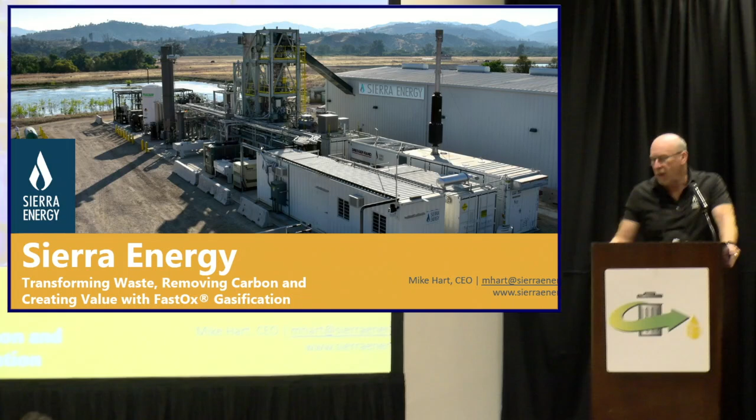And pictured here is our first facility, which is up in Monterey County. Not the pretty part, the other part. So don't think downtown by the water or anything. This is on a military base out in the middle of nowhere. But anyways, I'm going to be talking a little bit about our FastOx gasification technology.

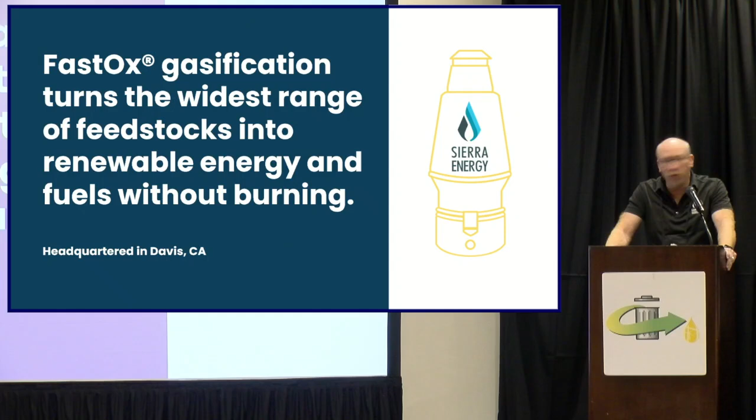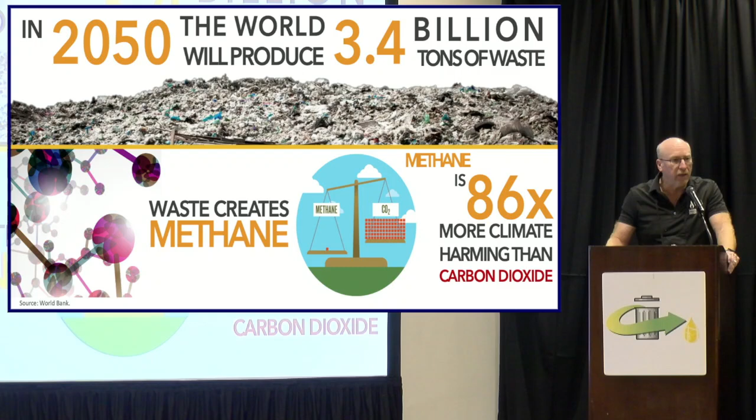And so what we do is our gasification technology can take any form of waste and break it down into its constituent elements, and does it without burning and without any waste product. I'm preaching to the choir here. As you know, the world creates a whole bunch of waste, 3.4 billion tons by 2050. And that creates an enormous amount of methane, which is 86 times more impactful than carbon dioxide.

The good news, we can turn it into all kinds of good things like clean energy. Bad news is there are all kinds of caveats to that. In fact, if I had to say there was one technology other than perpetual motion machines that needs a working model to prove it, it's going to be gasification. The field is littered with dead bodies as far as gasification technologies that didn't work out.

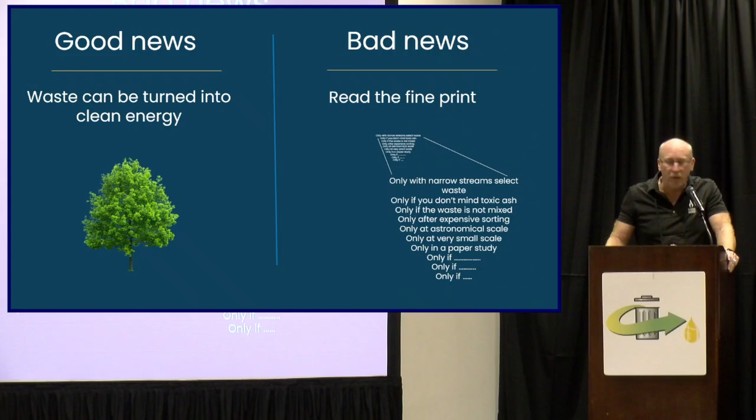And so there are lots of caveats, and there's a lot of limitations to what technologies historically can do in gasification. Usually a very highly desiccated, segregated, homogeneous waste stream with a certain BTU value that's been pulverized, dried, beaten, separated, God knows what else. The problem is that's really expensive and really hard to do, and it leaves a lot left over. So you were probably getting to this part ahead of me, that we're the solution.

But these are the different feedstocks that we have demonstrated on with our technology, with our partner, the U.S. Army, over the last 20 years of building progressively larger systems. Tires, municipal solid waste, pretty much any kind of biomass. Batteries, electronic waste, construction and demolition debris, medical waste, and pretty much any kind of hazardous waste. We operate at 4,000 degrees Fahrenheit. At that temperature, it forgives a lot of sins in your waste.

And so how our technology works is we introduce the waste into the system. It descends by gravity, and it reacts. The carbon in the waste itself reacts with oxygen and steam that are injected into the vessel. So there is no other energy form being put into it. It's just a reaction of the carbon in the waste with the oxygen. At 4,000 degrees Fahrenheit, it rips things apart. What you end up with is molten metal, liquid slag, which is a saleable product, and the balance is a synthesis gas, in our case, carbon monoxide and hydrogen.

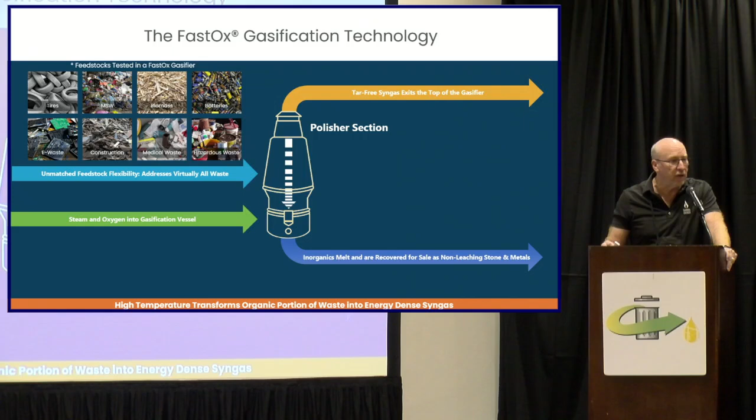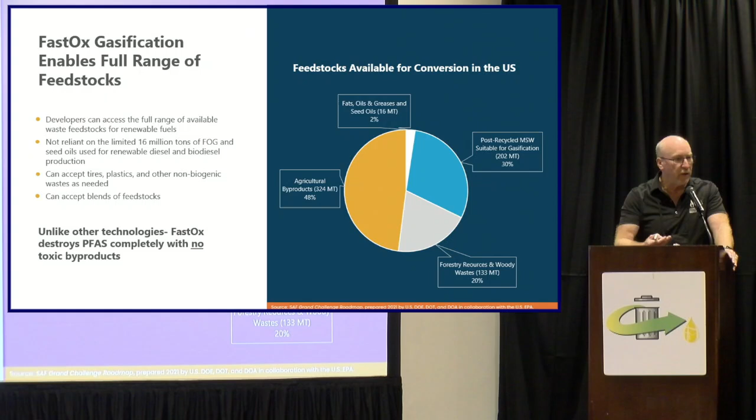A lot of people in the renewable fuel space endlessly talk about sustainable aviation fuel. Typically, they're focused around fats, oils, grease, seeds. There's this very narrow segment of feedstocks available when you want to make renewable fuels. Gasification, in general, opens the door to other feedstocks, such as municipal solid waste, agricultural waste, all of these other sorts of things that simply wouldn't be available otherwise. So gasification is an enabling technology.

There are other technologies talked about at these conferences, such as plasma, fluidized bed, indirect, and pyrolysis. Now, these are generally true. There may be exceptions to each of these categories, but in general, what we found is that there are limitations. In some cases, it's not a flaw, it's a feature; for example, pyrolysis focuses on a narrow segment of the waste stream. But they make a pyrocrude that can do all kinds of great things.

But what I'm saying here is that the real benefit of FastOx gasification over other sorts of gasification historically is a much higher yield, and that is the amount of synthesis gas you generate net after you've taken that waste and converted it using our process.

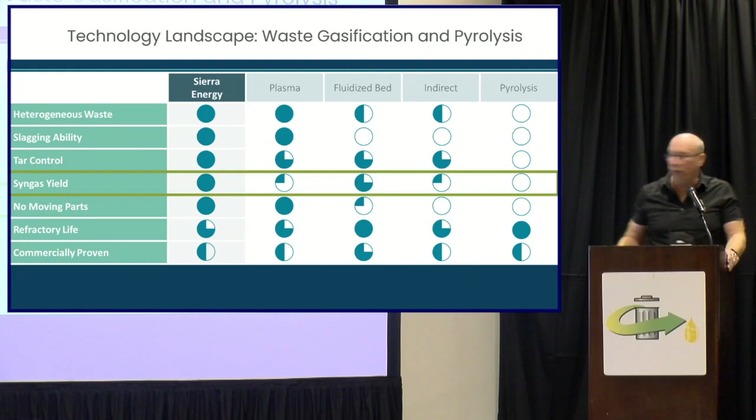Again, preaching to the choir. In fact, I saw a really good slide earlier today I'm going to steal later.

But as far as different things that you can do with synthesis gas, from the 10,000 plus inquiries we've received as a company, things that people want to do, or where there are processes that already exist to take waste and turn it into something of higher value through syngas: fertilizer, renewable natural gas, methanol, and all the things that unlocks, various chemicals, useful heat, protein, I didn't see that on the slide earlier, fuels and electricity. But the most common request we have been receiving is hydrogen. People are bananas about hydrogen right now because the incentives are lined up in the right direction.

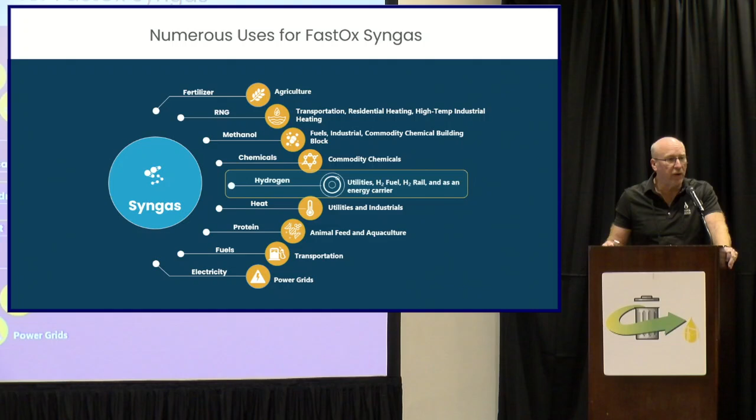So these are all different things that you can make from synthesis gas. This gives you an idea of yield. In this case, we're looking at a 200 metric ton per day system, 200 metric tons per day of different kinds of feedstock, and what it would yield generally in different things. So if you were to make hydrogen, for example, this gives you the number of tons per year of hydrogen that you would create from 200 tons of waste per day coming in.

Electricity, methanol, renewable natural gas, and ammonia are all shown. They're just giving you some examples based on different kinds of feedstocks. This shows the calorific value of those feedstocks converted to those end products. By the way, we don't do that. We just make a gasifier, and we make it available to other people to integrate into their very clever processes. We don't do the clever stuff.

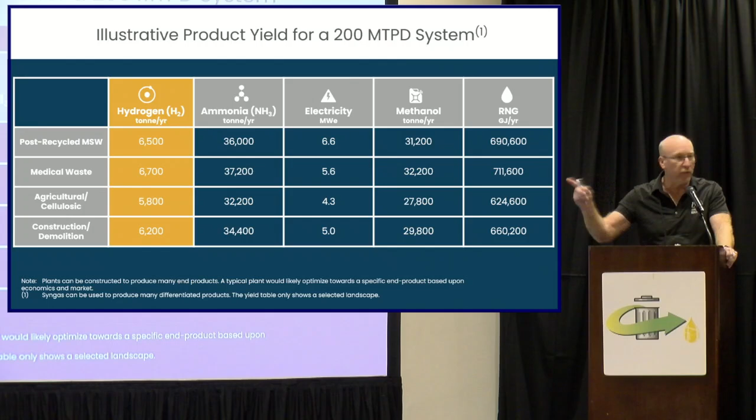So this is our demonstration facility at Fort Hunter Liggett in Monterey, California. We've demonstrated this system here since 2019. These are some of our investors, Breakthrough Energy Ventures, Cox, BNP Paribas, et cetera. I'm here because I am also the CEO of Sierra Railroad Company, which is the largest investor in the company, and I got into this to make fuel for my own fleet of locomotives, which are all over California. These are the folks that have invested in our company to bring it this far. Some of our partners, mostly governmental entities, have helped develop and demonstrate the technology, as well as a number of awards we've won.

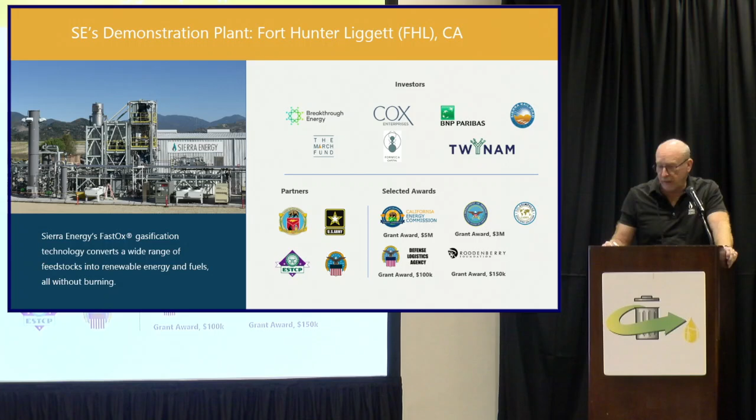So some of the benefits to folks that can use this technology is that you've got a modular design at 100 tons per day per module. We set that size arbitrarily. I was mentioning to some of the guys here that are doing a 50 ton per day gasifier, actually that's what we started with, but we had so many people saying that they really wanted to see something larger, and they had money, so we did what they said. So we went with larger systems. Right now, most of the customers we're working with are in the 200 to 500 metric tons per day range, so 2 to 5 modules put together.

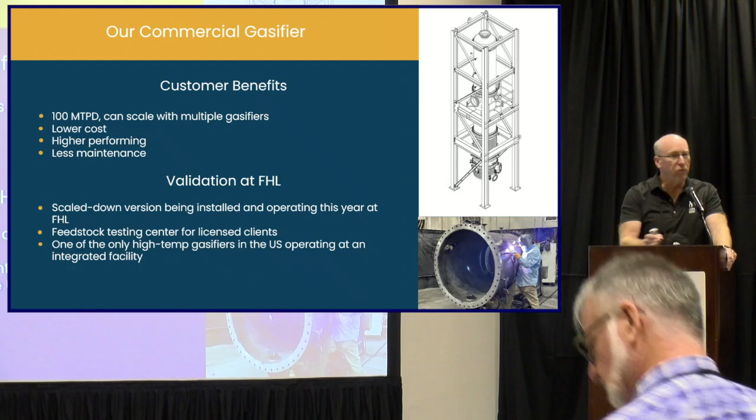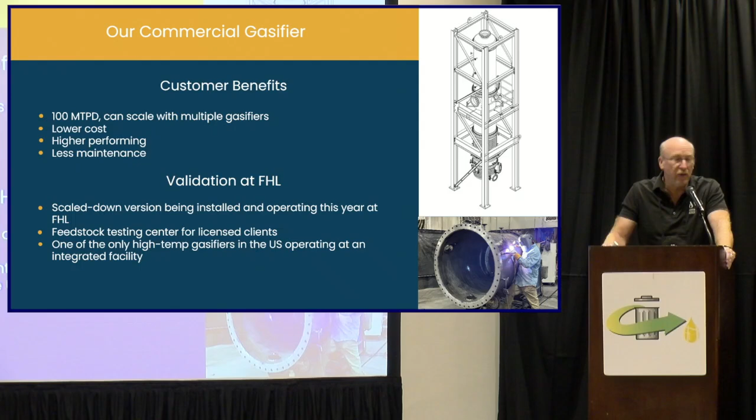One of the things that we found is that we are building a scaled down version of this 100 ton per day system, which is what we're going to be demonstrating there. Customers basically want to see it at a higher TRL level before they're going to write gigantic checks. And for those of you that have been following the saga of some other companies in our industry that haven't done so well, watching hundreds of millions of dollars disappear on great big projects, it makes a lot of sense to demonstrate it really thoroughly before you start spending the big bucks.

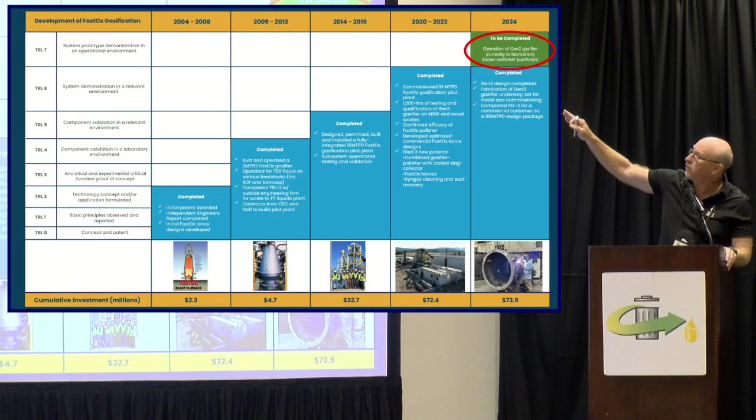This is a busy little slide, and hopefully you can read all the words on here. But basically this shows the progression of our technology through time. When we first started out 20 years ago, as we moved up the technological readiness level, as we've gone through each scale, demonstrating each aspect of the technology, the amounts of runtime in each category, new patents that have been filed, and then the actual investment. I think at this point we're at $74 million of our own money going into this thing, and this year completed to get to TRL 7, and that's actually just running this new version, which has been built.

We've done various engineering studies for different customers that have come to us. Some of them we can't give their names and such, but as they've come in, we do studies for them on how our technology will integrate into their system. We are not a project developer, and I won't have any of my own projects to talk about up here. These are helping other people with their big projects where a gasifier would enhance what they're doing.

An example of a project that we are talking to another company about right now: they're doing 1,500 acres of solar, where their objective is to make hydrogen. They're going to make about 40 tons of hydrogen a day net through their electrolyzers. We showed them with just an extra $200 million with gasification, we can take their waste product, which is oxygen. That's our feedstock for our system. Taking that oxygen into our system, we could double their output for an extra $200 million. So a 4-to-1 advantage as far as doubling their output by simply adding something they're already planning on building.

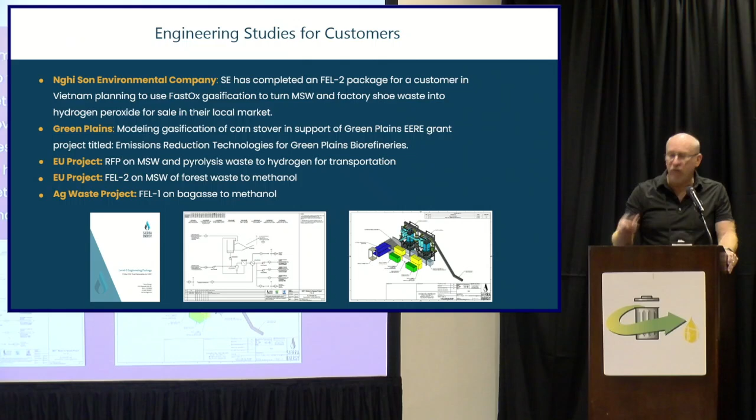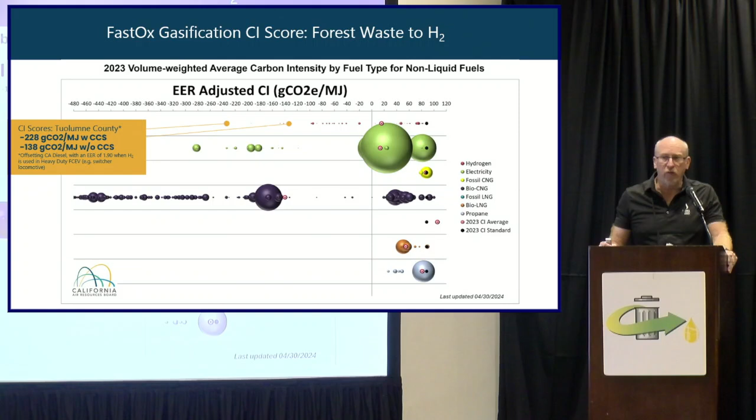So we see ourselves as a technology that's additive to things that other people are doing, whether it's pyrolysis, anaerobic digestion, or some sort of electrolyzer project. We focus on licensing and just making it available to people that have something they're trying to accomplish. As far as CI scores, this should be evident to folks here that are in this space, but when you take waste and use it to make hydrogen, you actually have a negative CI score. And more importantly, if it includes carbon sequestration as part of the solution, you can have a deeply negative CI score.

I mentioned that I'm also the CEO of Sierra Railroad Company. I've been the CEO there for 30 years. We were voted the nation's most environmental railroad, and we currently operate the lowest emission fleet in America.

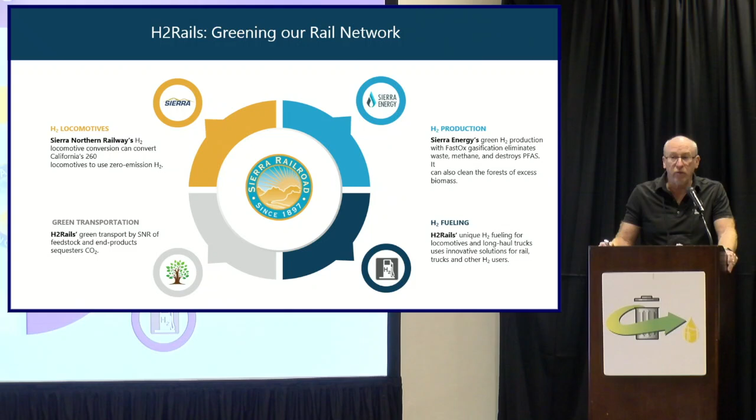One of the things that we're working on right now is how to move hydrogen by rail, and our plan is to move it effectively as a solid. There is a very long description of how we're going to do that, but it's basically using ferrous oxide and flooding it with hydrogen to turn it into virgin Fe, then flooding it with steam when we're ready to recover the hydrogen again. But it makes it so you can move it as an inert object. Each one of those blocks is 1 metric ton that contains about 100 kilograms of net hydrogen potential, but it makes it incredibly safe to move over the road. And for our fleet of locomotives, you can simply fuel by sliding one of these blocks under the locomotive. So it makes the handling and transfer incredibly safe, very easy, and that's our focus.

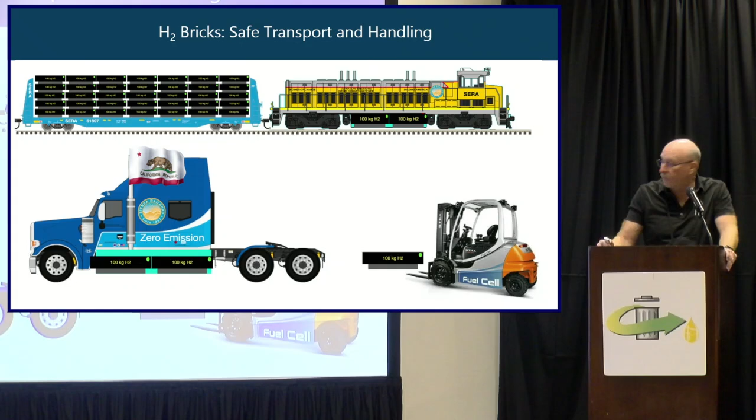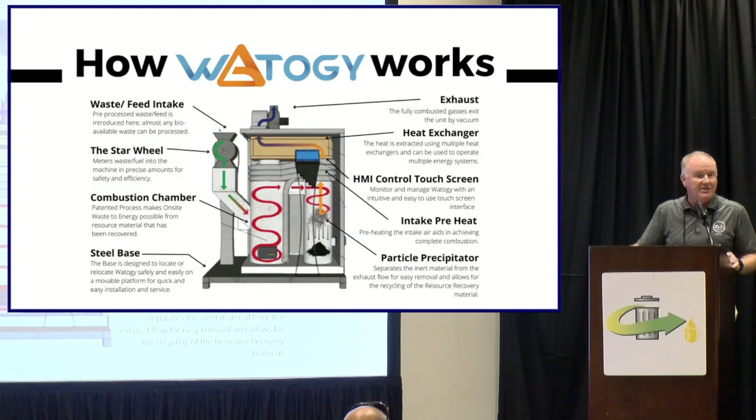Our goal is to partner with primarily paint companies and use that ash to help with those paint companies. They are interested in purchasing the ash that's left over. So we produce three outputs. That's the third part of the unit. You know, there's the pre-processing, the heart of Watogy, which I just showed you, and then the last part is what the outputs are. So we have three proprietary heat exchangers on the unit.

The unit runs at somewhere between 2,000 and 2,400 degrees Fahrenheit, so not near his 4,000 degrees, but high enough to where we do destroy PFAS as a byproduct of what we do with the solids. And we run those through our heat exchangers, and it allows us to push out customized heating, cooling, or electricity for the client, depending on their use case.

A lot of our industrial clients or wastewater treatment plants need a lot of heat for their processes. So we actually have a wastewater treatment plant that we're getting ready to install a demo unit, a pilot unit in, and they are actually using our heat to replace the heat they were using, because they were producing methane, and they can actually sell the methane for more money than our unit costs.

By the way, I didn't mention this before, but we're no CapEx. We're a leasing model. The unit is small scale. It's priced so that we can use the cost that we're replacing on waste management and energy production. So it's an operations expense that is actually a wash, or some of our clients actually come out ahead with the unit.

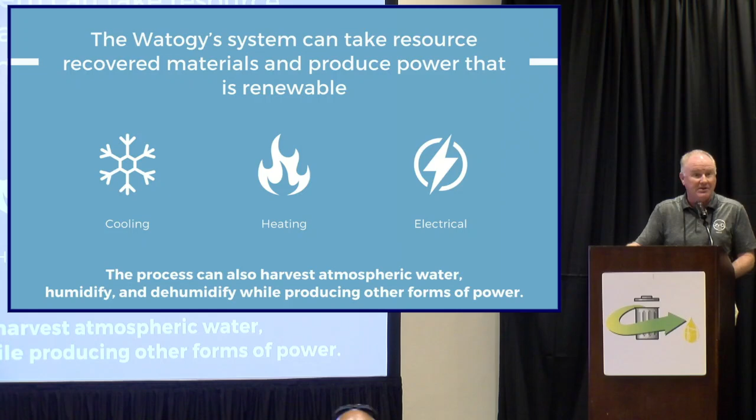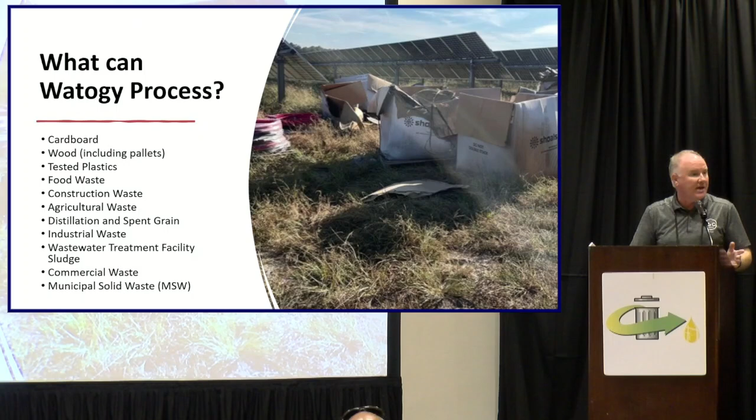We process a lot of different wastes. We've talked about most of these. I will tell you that our early adopters have been focused on wastewater treatment plant sludge, industrial sludge, some construction waste, and a little bit of agriculture. So again, we're not 200, I think you said 200 tons a day. We do about a ton a day.

Our unit is positioned so that it does about 500,000 BTUs an hour. So this isn't rocket science. Even I can do the math. We get a BTU analysis of the waste, and once we do, you divide that 500,000 by that BTU content, and that gives us the amount of pounds per hour that we can process.

Our unit is built to run continuously, 24 hours a day, 365 days a year. It does have the ability to hold temperature in the combustion chambers for up to 7 days to self-ignite. We start the unit and get it up to speed through a simple propane tank. It takes about 15 minutes to heat up the internal core enough to where it's self-igniting.

We use regulations that we've checked, federal regulations, but in particular, we have to work with the partner on any state regulations they might have. To this point, we've not needed a catalytic converter because the waste we've dealt with has not produced the NOx that would require one. We know from simulations that we can adjust our flow rate and the temperature to minimize that for certain clients, or we could just add a catalytic converter into the unit.

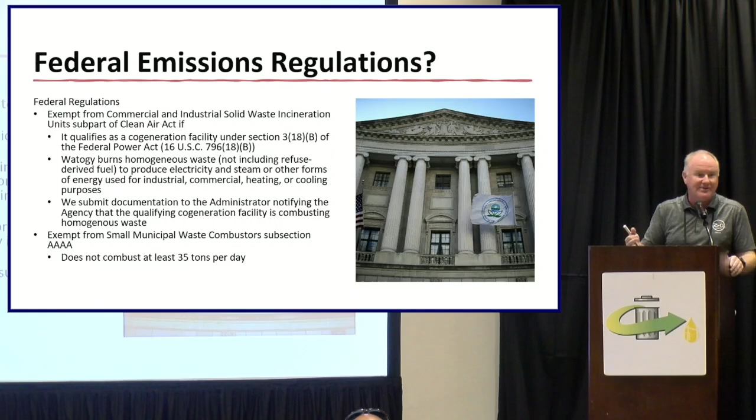So from an output standpoint, generally speaking, I mentioned that we have three heat exchangers. We typically focus our unit on producing this element. So we can produce 10 tons of HVAC and 35 kilowatts of power from our unit. We have a micro turbine that goes in to produce the electricity from the heat.

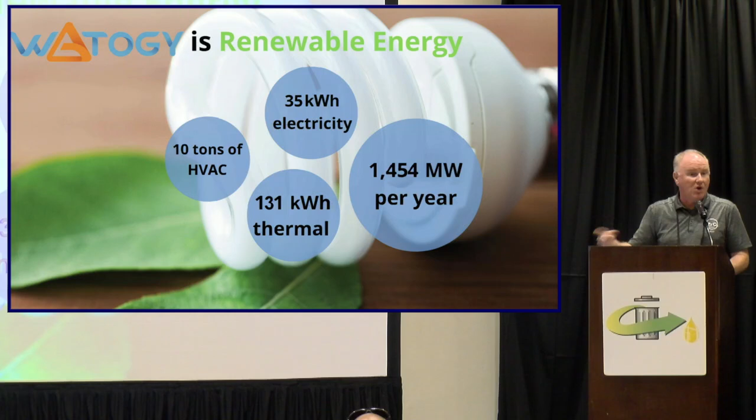And we have a partner out of Italy, with their U.S. headquarters in Evansville, called Robur, and they make heat absorption chillers. And so we can put two or three, depending on what the client would like in terms of outputs. We use approximately 6 kilowatts of the power for our own unit, and it runs all of the control panels and all the sensors and stuff.

I think I mentioned this earlier, but our unit's in a Conex box. It's done for safety reasons, but also because it makes it very convenient to move. And so we literally can pick up the Conex box and move it to another place.

What we found, especially in commercial and wastewater treatment plants, is they might have multiple places where they have waste being produced. We can put our unit or units, because we are modular and scalable, at the place where that waste is happening for that customer, and then connect our unit into their mechanicals based off of their use case and best optimization of that power that we're generating for them.

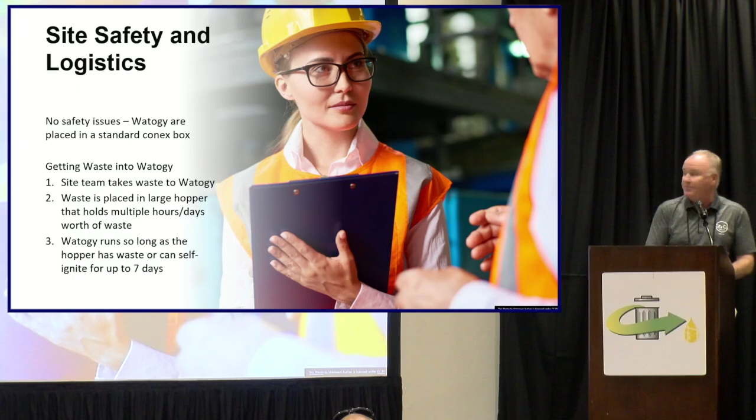I mentioned a couple of our partners. The University of Louisville Conn Center has been the strategic partner to provide a lot of the additional support that we need, especially on simulations. It's good to have a strong university that can do that for you, where you don't have to do it yourself a lot of times.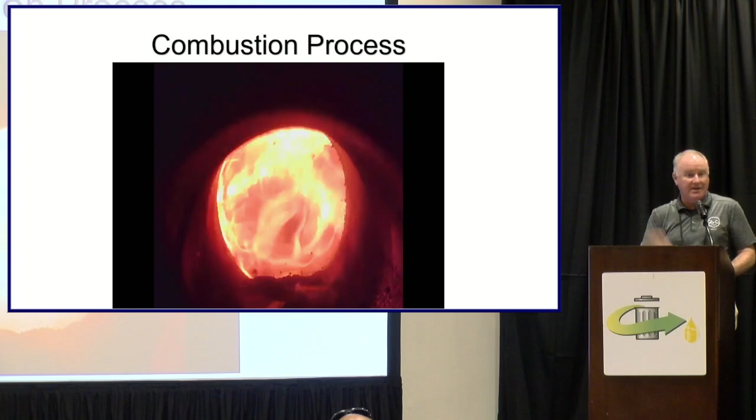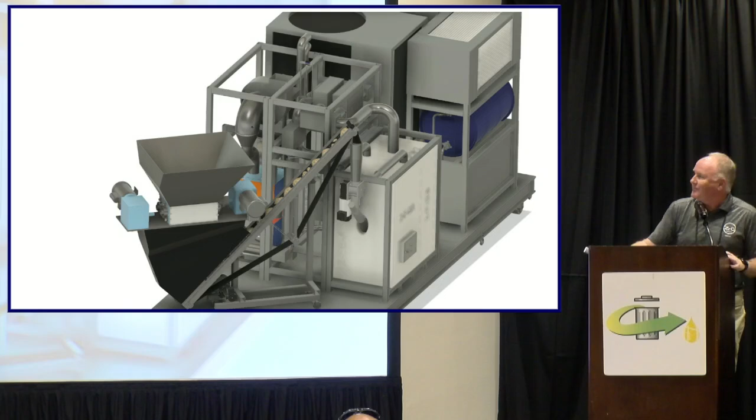I've got a simulation of what a unit looks like inside just to provide some context. So you'll see it's a Conex box. Most of you are probably very familiar with the Conex box. This is not scaling very well, but that's okay. What you'll see in here is our, oops, sorry, I was trying to pause it. Can you see if you can do that for me? Sorry, I won't try and pause it this time.

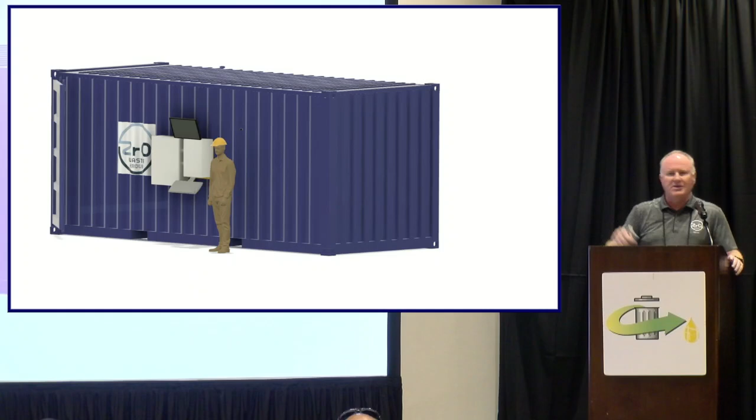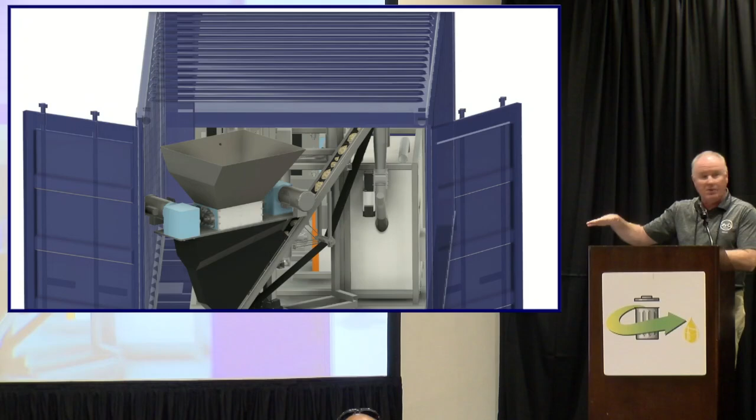So we built the unit so that we can actually minimize the downtime by literally coming with a specific area. We can replace any of those parts on site within an hour. And so we don't have to repair on site, we can literally replace. The simplicity of this is part of our strategy for implementation and expansion, to make sure that we are successful in the early adopters, because most of our early adopters need tens to hundreds of units.

And so our goal is to find the right early adopters, which we have 10 right now, and for the next 3 to 6 months, place those units at those partners and be able to demonstrate the use case scenario for each of those different partners in different sectors that we partnered with.

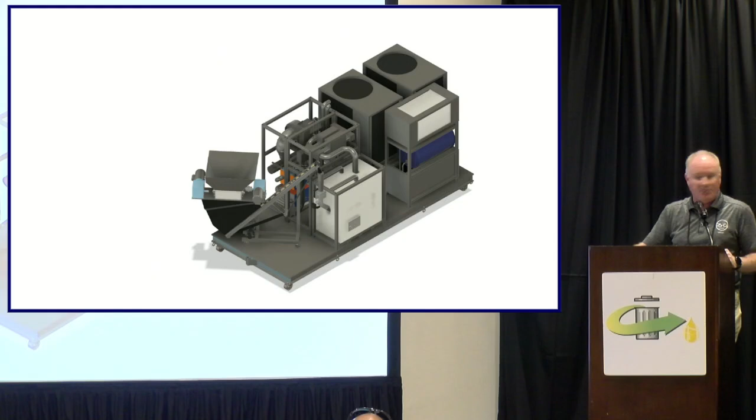Well, thank you for those presentations. Very, very interesting. Modular operations are always, I think, intriguing, to put them at the generation of the feedstock that you have out there. So what questions do we have from the audience? Yes, ma'am. We'll get the microphone to you.

This is a question for Mike. Could you tell us if Sierra has any plans for commercial scale facilities? I'm sorry if you already covered this during your presentation, but it would just be really interesting to know if a commercial scale facility like yours could be viable in California. You threw in a curveball at the very last sentence there.

For starters, I mentioned we've had 10,000 inquiries. Of those, there's probably 12 that are willing to buy a serial number one, and of those, 8 are engaged in active siting plans and things like that. Only one of them is in the United States. The incentives are extraordinarily good. I've switched microphones if you don't mind, but only one is in the United States. Mostly uncertainty around the IRA and such for a lot of people's large projects. Most of the projects we're getting tucked into are $400 million to $2 billion projects, of which we're a little piece.